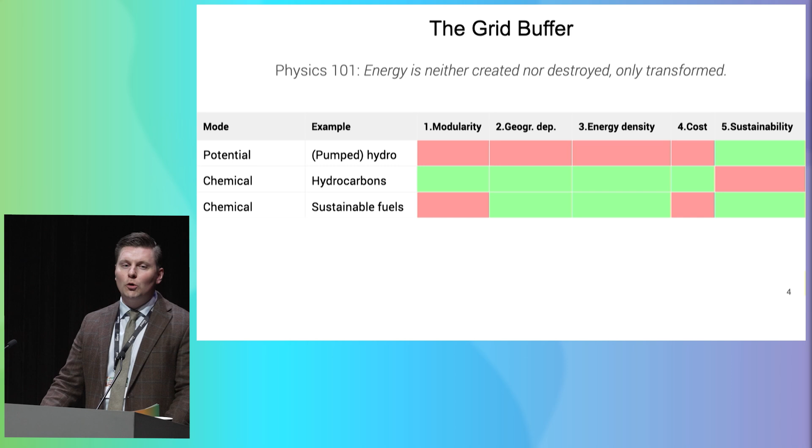We need to replace it with something. And I'm going to quote Brad Pitt from Moneyball: I don't think we can recreate fossil fuels, but we can recreate it in the aggregate. So sustainable fuels—ammonia, hydrogen—will definitely play a role there for high energy density applications.

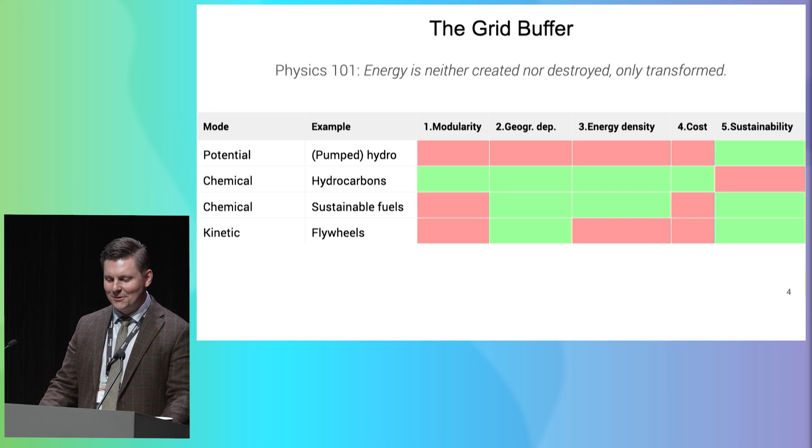There are a bunch of others, and I'm taking the liberty here to talk about some other non-applicable options. I mean, we can use kinetic energy, we can use thermal energy, but these—I hope nobody here is working on them—kind of suck.

Well, now you really see my bias, because I posit that electrochemical energy, or batteries, is the way to move forward with energy storage for medium and low energy density applications. They're modular—you have them on your phones, your laptops, your cars. They're geographically independent. Energy dense—well, sure, for cars, but currently not for aviation or maritime. Cheap—well, we're getting there. And sustainable—well, depends on how we use them.

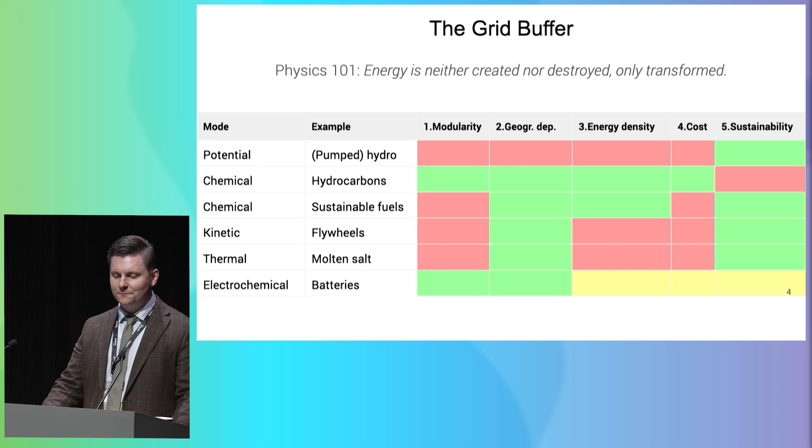Now let me give two quick case studies. I spoke of inconsistent federal regulation in the US, but California has been very consistent for the past 50 years—for example, their fuel standards have been adopted by other states and ultimately at the federal level. California has increased its proportion of solar on the grid dramatically, only in the past 15 years, so it now composes a third of electricity on the grid.

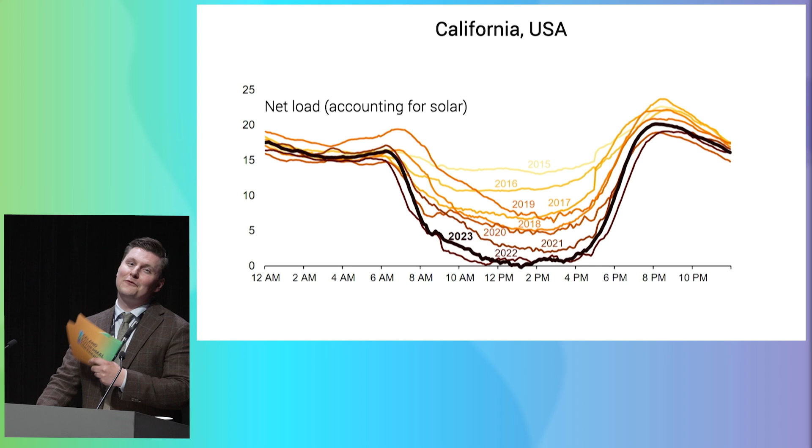What you see here is the famous duck curve, where you take the gross load and subtract what you get from solar. This is a year old, but what you'll see a lot these days is that on a sunny day, the net load on the grid will actually be negative. So if you're using batteries, you get paid for charging them. I think this has been the case in some parts of Germany as well.

The second case is the Westfjords in northwest Iceland. They are a remote area with a single transmission line that traverses a mountain. Murphy's Law is a thing, so invariably at some point during the winter it will trip, meaning the region becomes dependent on costly and unsustainable gasoline generators. So my proposed solution, instead of building a new buried transmission line that would be ten times more expensive and take a long time, is to use modular grid storage to actually resolve this problem.

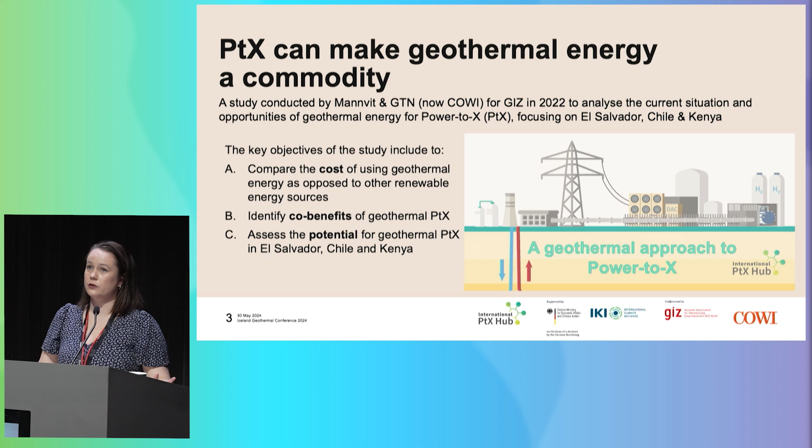This was mainly done through desktop research and interviews with experts in the field of geothermal power to X and regulators. Power to X can make geothermal a commodity that can be transported quite easily, and perhaps open up locations previously not considered desirable for power generation.

There are at least two small-scale geothermal hydrogen projects operational, one in Hellisheiði and one in New Zealand, producing 750 kilowatts and 1.25 megawatts respectively.

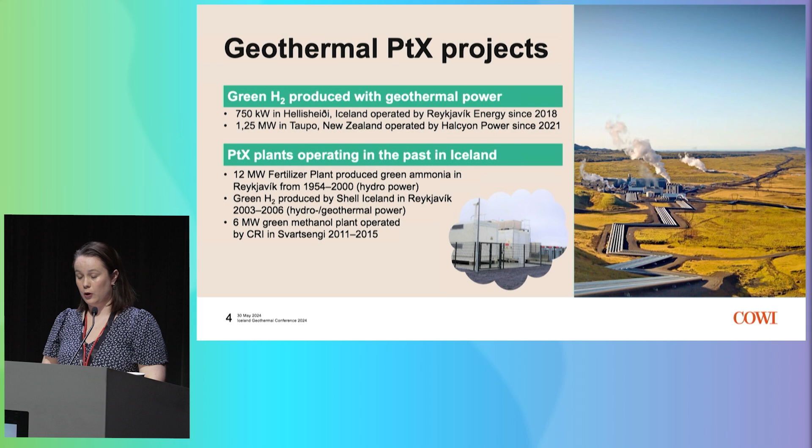In Iceland, some power to X plants have operated in the past. Just to name the obvious example, Carbon Recycling International operated a plant next to the geothermal power plant in Svartsengi, using 6 megawatts of geothermal power.

Hundreds of projects using other renewables, such as solar, wind, and hydropower, are currently being planned. But based on the findings, there has been significantly less focus on using geothermal.

The main derivatives are hydrogen, methane, e-crude, methanol, and ammonia, and most or even all power to X processes begin with the electrolysis of water to make hydrogen. Therefore, for any power to X project to become economical, the cost of hydrogen is crucial.

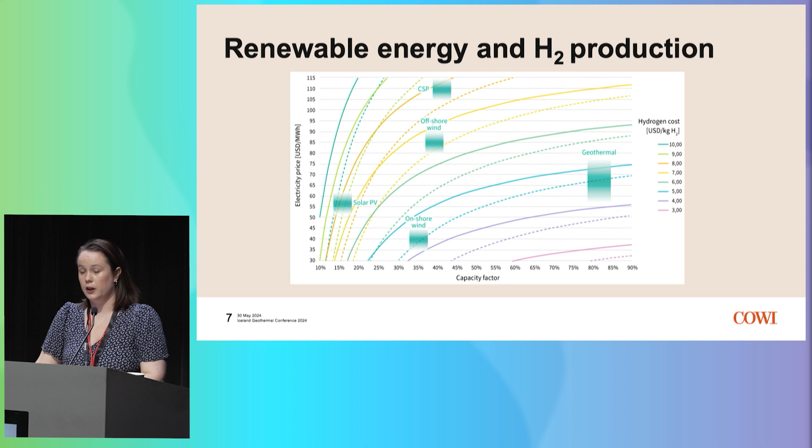The broken and unbroken lines represent different types of electrolyzers, and the cost of hydrogen was based on average electricity generation cost for each renewable energy, given in an IRENA report published in 2020.

I'll go into this a bit later, but a combination of renewable energy sources is something that should be considered. The main advantage identified in the study, as we've talked about before, is the stable power supply, grid stability, and high capacity factor.

Some other potential co-benefits of using geothermal sources for Power-to-X: the obvious one is direct use, which can provide heat supply for either the Power-to-X technology itself or the electrolyzers in the future, potentially. Then there are less obvious ones, looking into direct uses or cascade uses.

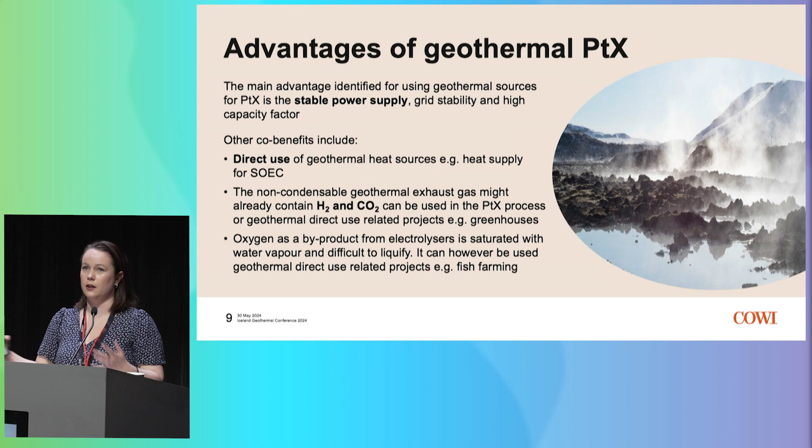The least obvious one is the oxygen from the electrolyzers, which is difficult to use in other applications, but could be used in a cascade system, for example, for fish farming.

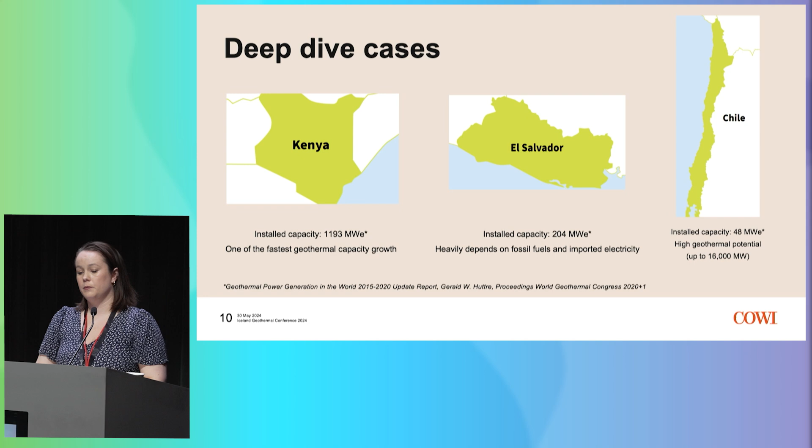These are the deep dive cases, selected by GIZ: Kenya, El Salvador, and Chile. Kenya has geothermal capacity growth which has been one of the fastest in the world. Chile and El Salvador have favorable conditions but currently not much electricity produced with geothermal. There is extremely high potential for Chile, and El Salvador heavily depends on fossil fuels and imported electricity, which makes it interesting.

Going a bit into the deep dives: Kenya has expansion estimates for renewables, both geothermal and wind and solar. Currently, Kenya has a renewable energy surplus during the night and even sometimes during the day.

So opportunities for Power-to-X have been explored and are currently being explored, with three areas identified for high potential: at the coast, near the geothermal areas, and in industrial areas.

One of the greatest opportunities for Power-to-X in Kenya is the production of ammonia for fertilizer production. Most of the currently used fertilizer is imported, so this would be a great thing to have produced locally.

It also came up during the study that Kenya could become a refilling point for ships in the Indian Ocean using the ammonia.

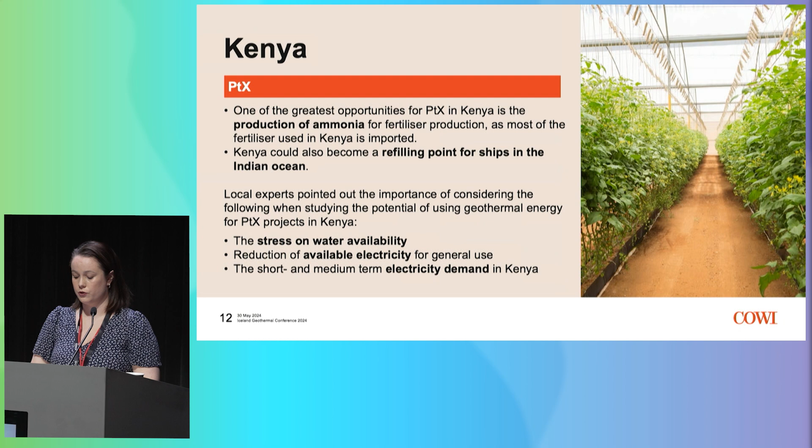But what was really stressed during these interviews is that local experts pointed out it's very important to consider that Power-to-X would increase stress on water availability and reduce available electricity for general use. Also of importance was giving back to the local community, which is why the main focus is on fertilizer production to increase accessibility and affordability.

For El Salvador, there are plans to increase the current geothermal capacity. An energy plan is in the works and might have been published by now—this is a 2-year-old study.

But there are still no concrete strategies for geothermal use for production of green hydrogen. There is no industrial production of Power-to-X, and the local market is very small, so export would be of most interest in El Salvador.

For Chile, in terms of geothermal energy, there is one power plant which is to be expanded. There are many geothermal areas that are very remote and hard to access, even though there is this massive potential.

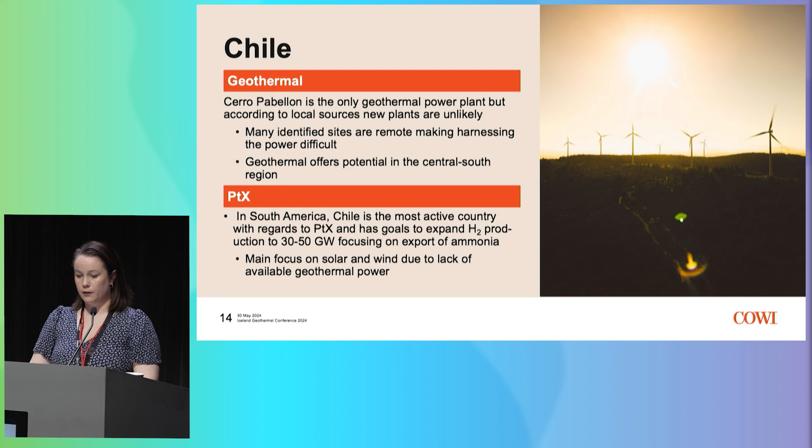In South America, Chile is among the most active countries in terms of Power-to-X, with the goal of expanding its hydrogen production up to 30 to 50 gigawatts, mostly using wind and solar. The focus of these projects is mainly export of ammonia or methanol.

To finish, the main recommendations: combining different renewable energy sources for Power-to-X projects should be considered, because a complementary setup can achieve high capacity factors and a reduction in total cost.

The construction of new geothermal power plants is usually stepwise and, as we know, takes 10 to 15 years, and it also involves high upfront payments. So having this mix of renewable energy sources can help the Power-to-X project start.

Also, as always, studying the location of the proposed project should be done—there are many additional factors that contribute to this beyond just geothermal energy. And then finally, to investigate the project cost and related options based on the actual energy cost structure.

The calculations in the study can assist to define the possible cost for hydrogen production. Yeah, that's all I have. Thank you.

Thank you very much, it's an honor to be here, and thank you for the opportunity. As described, I'm from Arctic Green Engineering. Yes, Mannvit joined COWI, except the Hungarian subsidiary, which joined Arctic Green, and we now provide engineering services as an Arctic Green company for geothermal projects, now and in the past. I will talk about geothermal energy and balancing by geothermal energy.

I don't know if you have ever thought about this, but geothermal energy is maybe the only renewable energy that can provide everything: electricity, heating, cooling by the heat, and also life quality and well-being through bathing and all kinds of installations like we can see here all around.

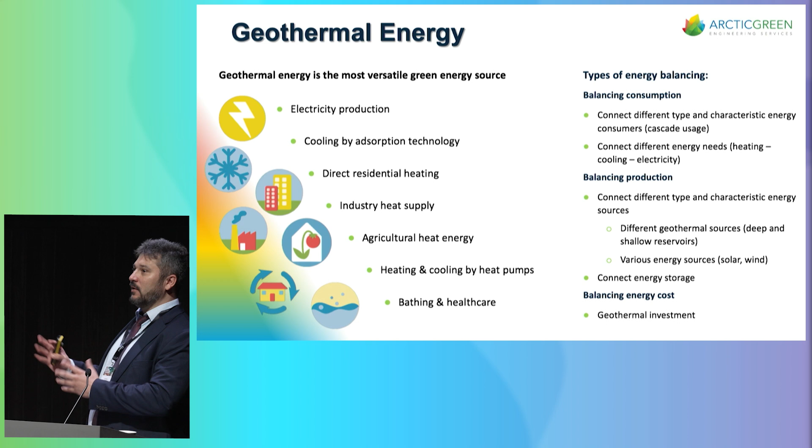But how can we balance it? Geothermal is for base load, everybody knows and talks about that. But what if the demand is not continuous? Then we have to take measures or combine different consumptions to balance production and utilize its baseload capacity. But what if there are other energy sources, like solar or wind, which are not stable? Can we use geothermal to adapt to those fluctuations and balance them? I will show that. Of course, geothermal by its nature is also very appropriate to balance the long-term cost of energy. Those are the three topics I will talk about now.

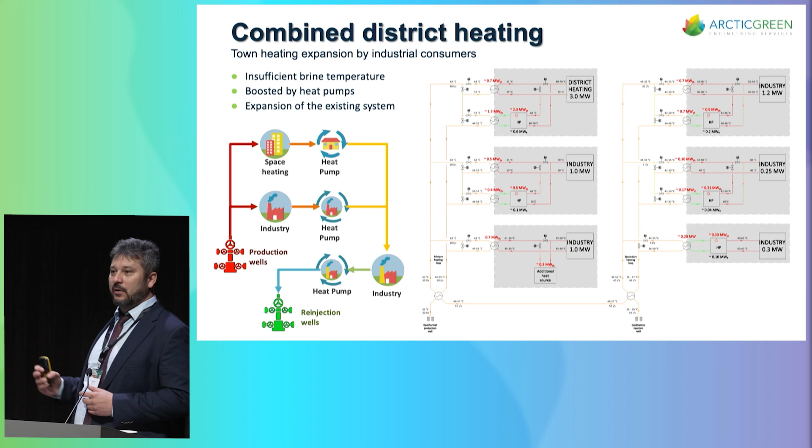First, about heating. There is a small system we are developing: a small district heating system where the heating temperature is not so high, but the resource temperature is somewhat lower. That's why we implement heat pumps to boost the temperature a little during peak seasons. There are other consumers, industries willing to join, some with high temperature heating needs, some with low temperature needs. We connect them into a cascade system, where the wastewater from high temperature utilization can still heat the low temperature consumers, boosted by heat pumps as needed.

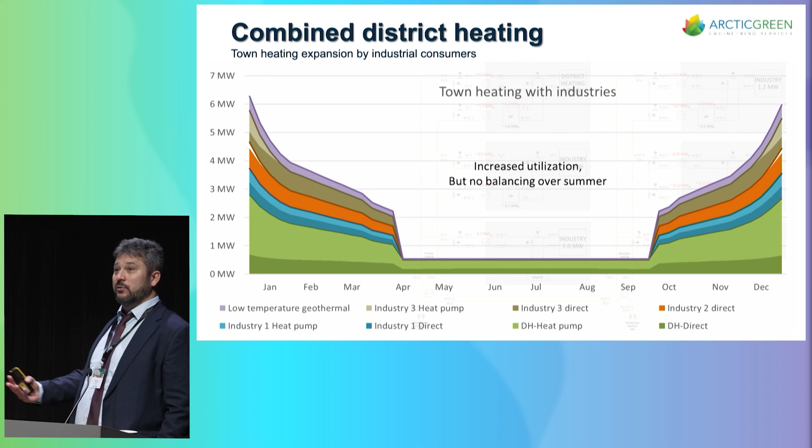But still, over summer there is almost no heat demand, so it's not really using the base load capacity of geothermal energy. How could we utilize it? We could utilize it by connecting other energy types.

Another example: an industrial user who has both cooling and heating demand, for technology and for comfort, with different temperatures and needs. If we connect them into one system, then over summer cooling could be provided by absorption chillers. Of course, the technological heat demand is continuous. Both heating and cooling demand are continuous over the year, but comfort heating peaks over winter, and cooling peaks over summer. By connecting them into one system, the energy demand becomes quite balanced.

Almost 100%. The cooling demand cannot be fully provided by the same system because of the efficiency of absorption chillers, so some conventional cooling solution is still necessary to cover the peak. But you can see in this curve, it's totally different from the previous one — the cooling can utilize the base load capacity of geothermal.

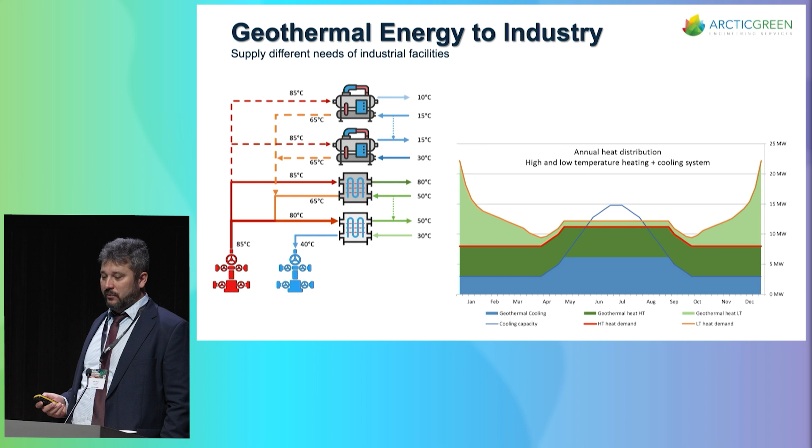What could be even better: if you build a geothermal power plant, use the waste heat for heating, greenhouse heating, or a district heating system, secondarily with heat pumps, using more of the heat. But in most cases, the waste heat of the power plant is limited by temperature and by its amount. So what could we do if the geothermal power plant is controllable? We can reduce somewhat the capacity of the geothermal power plant over the coldest days of winter, and then supply a much higher energy amount for the heating systems temporarily when it's needed.

You can see the dark blue line is the capacity of electricity production—it's a 4 or 5 megawatt power plant. Normally, without this controlling, the waste heat capacity could be 10 or 15 megawatts thermal, which could be supplied for any kind of heating system. But with this controlling, if we reduce the electricity capacity over winter, we can supply more than 40 megawatts to the heating system. Obviously, the produced electricity amount is a little lower, but the additional benefit is that we can supply a very high amount of heat, both for greenhouses and for space heating systems.

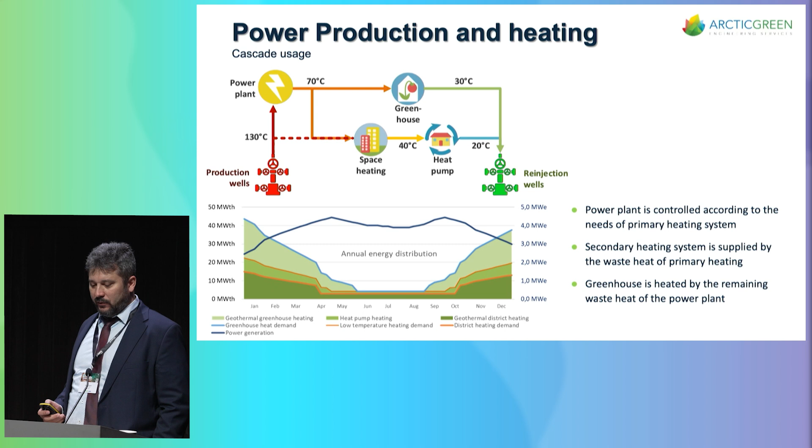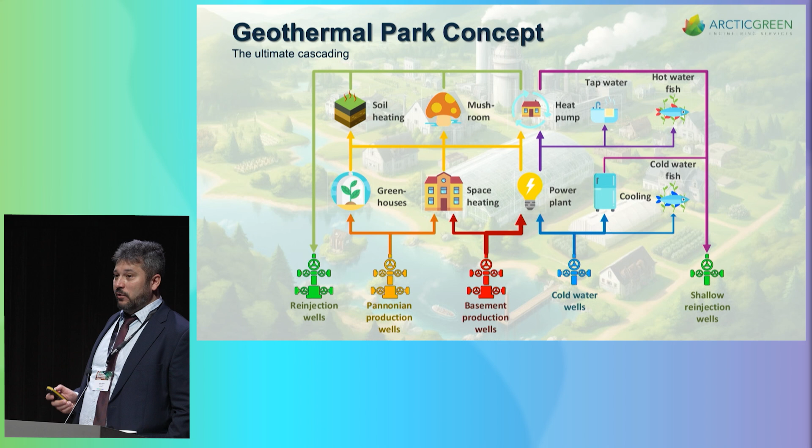I will maybe skip that to save time. There was a project we designed where almost all of the Lindal diagram was planned to be built. Unfortunately, that was never executed due to financial issues. But the project included hotels, spa, agriculture, and fish farms—all planned. The plan was to drill different wells for different reservoirs, including shallow wells for cooling, along with a geothermal power plant. That could have been a really good efficiency utilization of the geothermal resource. We will not go into those details.

Let's talk about electricity production. I will talk about binary production, focusing mainly on European, Central European conditions, where steam turbines or flash systems are rarely applicable. Conventional binary cycles, ORC plants, tailor-made design—that's shown in the lower right corner—are very, very commonly used.

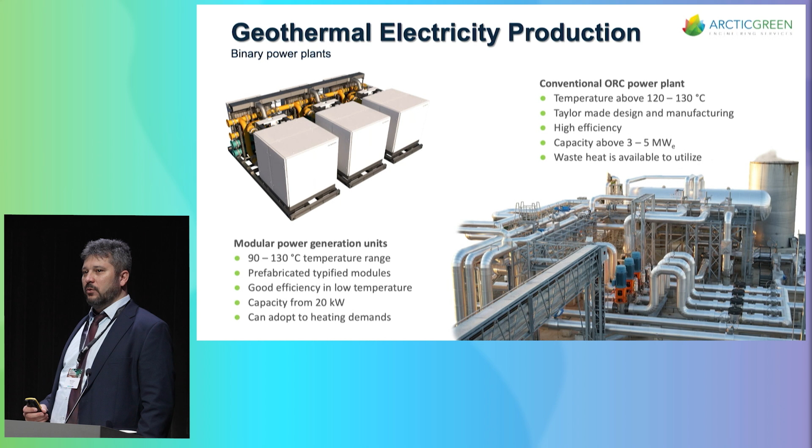Other option is the small modular system. Marta probably knows it better, which can adapt very well to the needs of the heating system for small installations, but they are very well controllable. I will get back to it later. They can be very well installed in addition to any geothermal heating system, or designed together with one.

How about geothermal electricity production? It's a baseload power—yeah, that's true. It has continuous operation 24/7 all around the year. It's not dependent on weather changes. It requires some minor maintenance, everybody knows, so it's a very, very stable and reliable electricity source.

But if we go into the details, are these really true? Yeah, it can operate continuously except for maintenance, but is it really weather-independent? More or less, yes, but if the cooling is not provided directly by cold water and there is instead air cooling, then the ambient temperature has some effect on the efficiency of the power plant. When the weather is warm, as shown on the next slide, there is a decrease in the efficiency of the power plant, and the cooling system also requires higher energy amounts to operate.

So there is some small weather dependency in geothermal electricity production as well. If we see a daily distribution, the picture is a little more equal—there are minor differences overnight versus over the day when the sun is shining and the weather is warm. There is some small decrease, but it's quite constant. Of course, there is a difference between a winter day and a summer day.

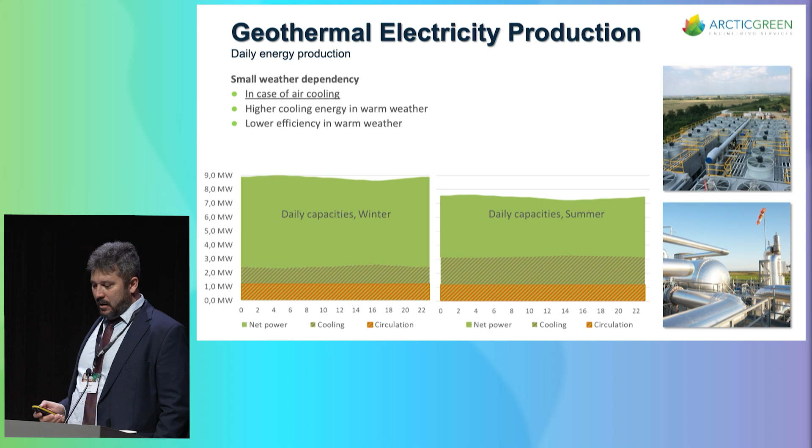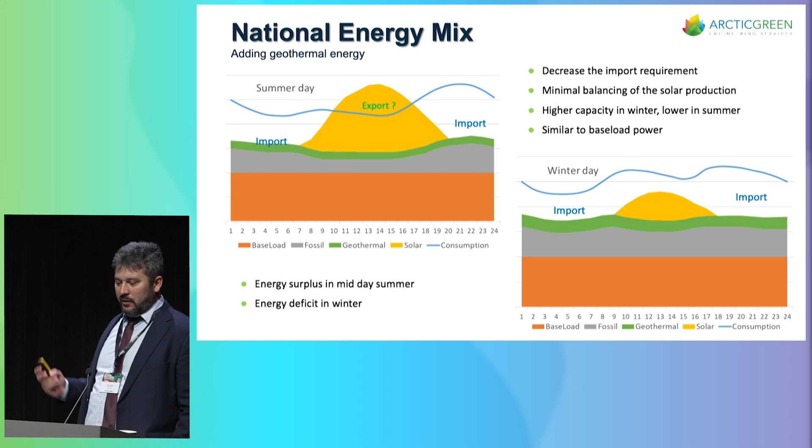How does this curve look if we add geothermal capacity? A few hundred megawatts, not a huge addition. If you have good eyes, maybe you can see the green line is somewhat thinner at midday, but that's minor—so really it works like a baseload, adding capacity to the orange. So by its nature, it's not really balancing the energy.

But there is an idea, and there are more and more talks about it: that the geothermal power plant system consists of two parts—there is the brine system, harvesting and circulating the brine, and there is the power plant.

What if we turn off the power plant at midday and keep the brine circulation, using the energy for cooling, for example with absorption, or just have it as a consumer? Then we can consume the electricity produced by solar, for example. We can use it for cooling and not producing, of course. That's a balancing act. If it's a good, environmentally friendly solution, well, I'm not sure. That's kind of firefighting, but it could still be a solution.

And if the energy price is negative, it can even generate some profit. The power plant can adapt, so it can be designed to be controllable. That increases the capex somewhat, but still, it's a solution.

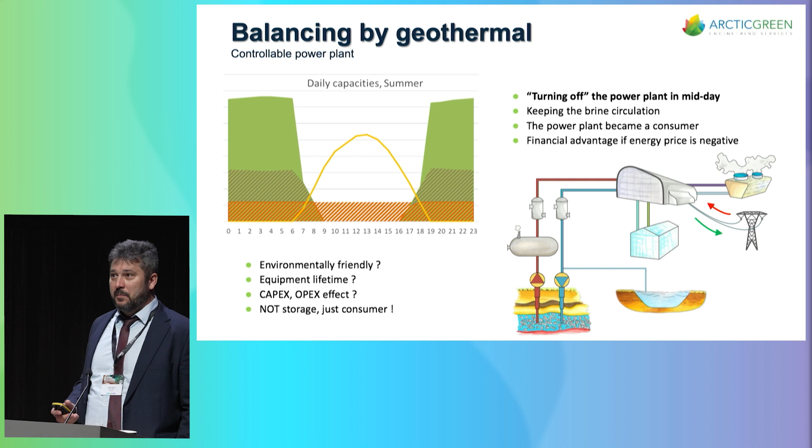I have two very interesting curves about the costs, but my time is over, so I'll just tell those who are interested about them. Okay, thank you for your attention. Thank you.

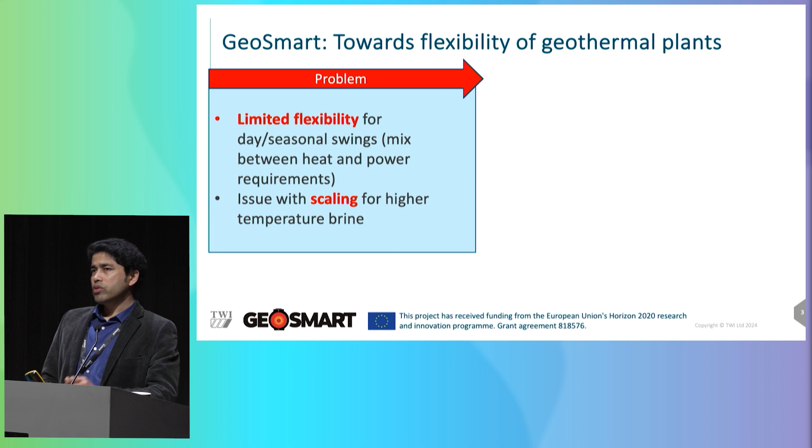In the project, when we started a few years back, over 4 years ago now, we started to look at the limited flexibility of geothermal, and there were some scaling issues in the geothermal plants. We have three partners, but two actively involved in the power plant industry: one from Kızıldere, Zorlu Energy in Turkey, and the other part of Vulcan Group in Germany, not too far from Karlsruhe, in a place called Insheim. They've got a plant there. So we thought maybe we could look at the energy storage part of it to increase the flexibility of geothermal plants, and then also look at the ORC system with adiabatic cooling, and maybe look at scaling reduction systems.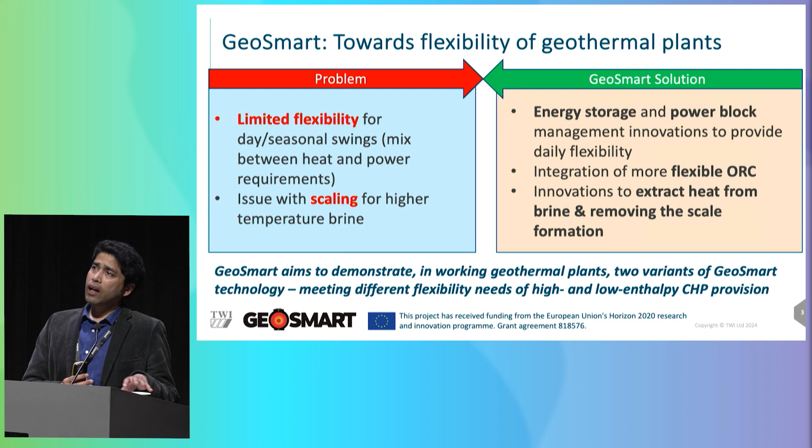So what am I going to talk about? I'm going to talk about phase change materials, which are used for thermal energy storage. One of the simplest known phase change materials is water, and it has been used for a long time in terms of using the latent heat for energy storage, or rather energy conversion.

Typically in these phase change modules, what happens is when you have the hot fluid, in this case could be geothermal fluid, you use the heat to then convert a phase change material or material - it could be salt, it could be some other fluid, which can undergo phase change within the temperature range you're working on. It uses the energy and stores it as latent heat, maybe converting from solid to liquid and staying liquid for a bit. When you need it, you can then pass a cooling fluid, could be water, could be something else, to extract the heat, taking the latent heat out of that phase change material and using it elsewhere. The problem with this is the selection of phase change material - you need to know exactly the temperature range and a few other things to find the right one.

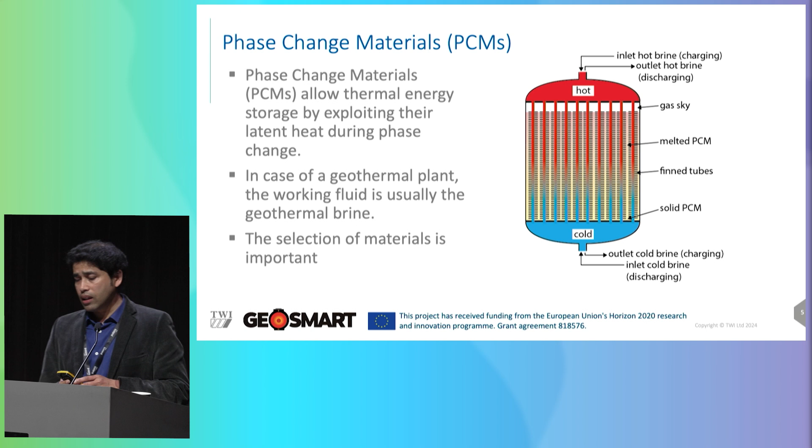When we started this project, we looked at literature and at what partners within the consortium had done in this area. We decided to start with one of the most commonly used materials, one that we thought would be really good because of its very high melting enthalpy. The temperature range we were looking at for these systems was typically between 120 to 130, 140, so that meant this could be something we could use.

So I've listed some of the things one needs to look at: operating temperature, melt enthalpy, diffusivity, and cycling stability, which is quite important because if you're cycling through several hundreds or thousands of cycles, that becomes a significant factor. Also vapor pressure, health and safety related toxicity, and cost is always important.

And a few other things which I haven't quite noted, because we realized in some cases, when we actually started with the adipic acid, we found some challenges which we didn't consider at the start.

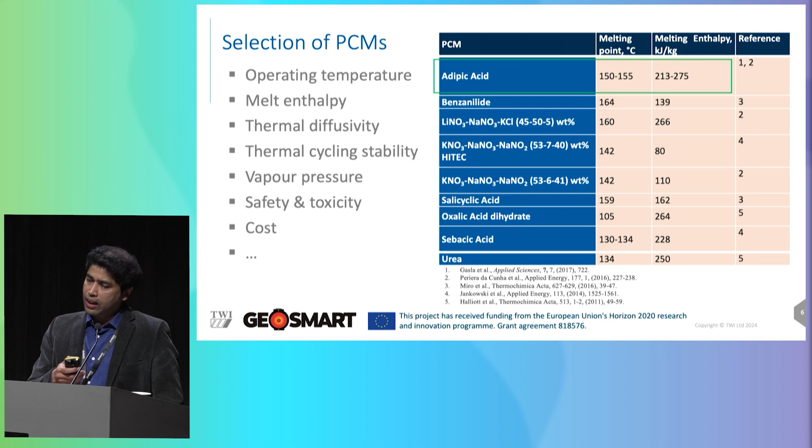This work was done by my colleague Sebastian from Fraunhofer in Germany, and they started to look at the aging issues with the adipic acid. The team carried out 1,000 hours of testing in air and argon, and found that there is quite a bit of degradation happening due to these cycling processes.

After 1,000 hours of cycling, be it in air or argon, we thought there would be a significant difference between the two. But what we found is you're typically seeing maybe a 10% reduction in terms of enthalpy. So over the years, the system would slowly degrade, and the thermal energy storage capacity would also decrease by about 10% or so within the 1,000 hours that we did.

The other thing we wanted to understand is whether commonly used materials of construction could work with this kind of phase change material. So we took three of the most commonly used construction materials: aluminium, carbon steel SA179, a specific grade of carbon steel, and we also wanted to check one of the commonly used stainless steels, 316L, to see if that would work too. We know it's a lot more expensive than some of the others.

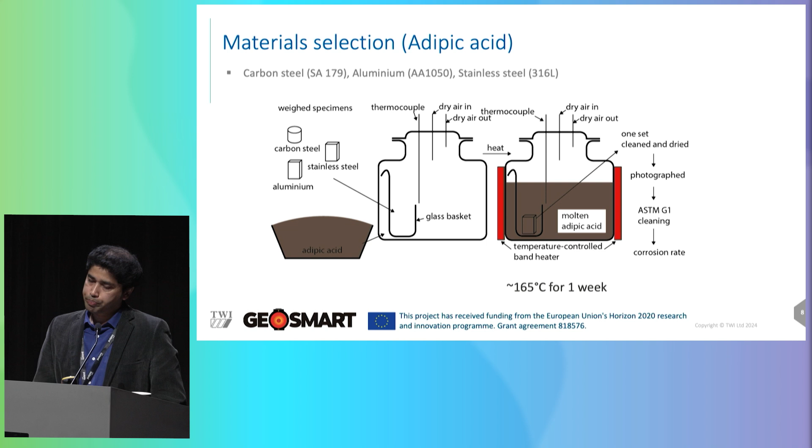What we found is that in carbon steel, we could very easily determine there was some tarnishing or corrosion process happening which changed the color or appearance of the surface. In case of aluminium, there was some difference. In stainless steel 316L, we couldn't really find much, and there was no localized corrosion either.

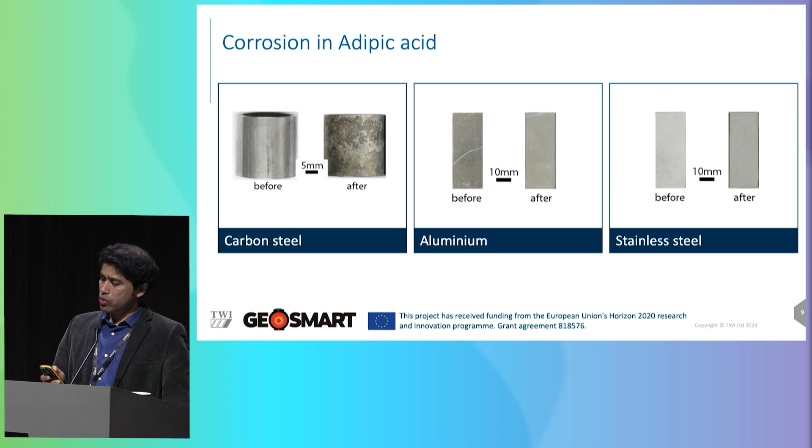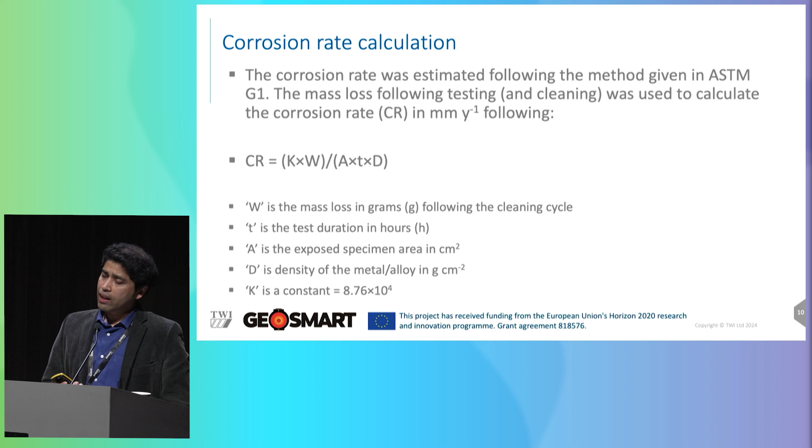As I said, we used the ASTM G1 cycle, so you weigh your sample before and after, go through cleaning cycles, and use the equation there. It's basically a first principle determination based on surface area and mass, and we calculated the corrosion rate. What we found is that in case of carbon steel, the corrosion rate was quite high.

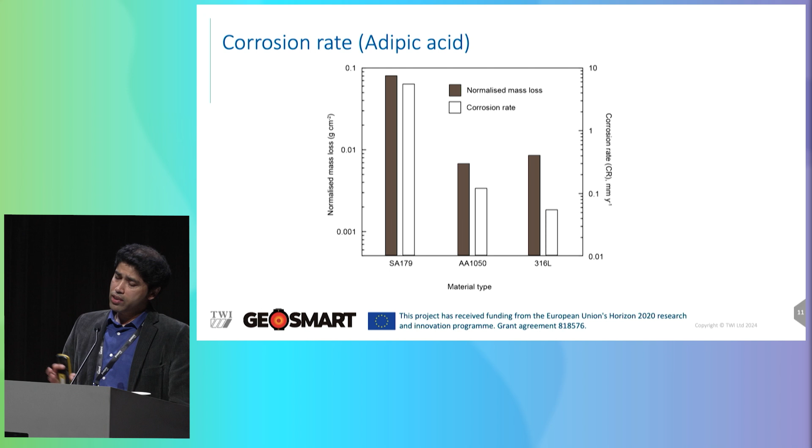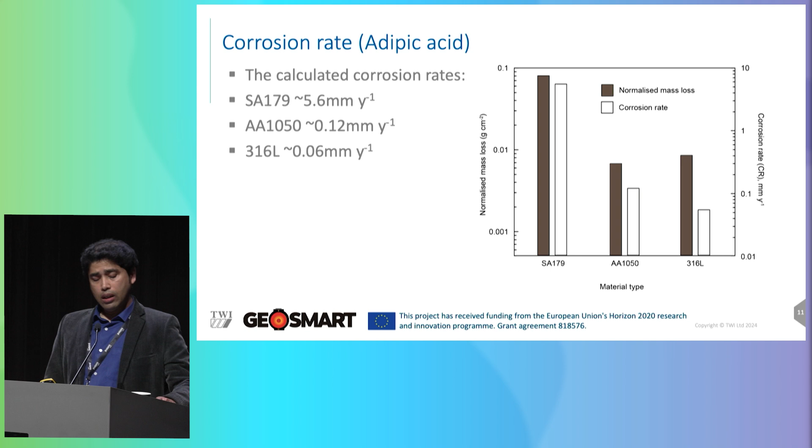You can see the numbers are quite high there, about 5.6 or 6 millimeters per year or so, and in case of 316L and aluminum, they were more manageable. When we looked at the numbers in more detail, it came out to over 5.5 millimeters per year, which is unrealistic — a plant cannot operate with corrosion rates that high. Aluminum was pretty good, and 316L we knew would most likely be quite good too, but due to cost-related issues we couldn't possibly use that kind of material for this plant. So we had to go back to the drawing board and start again.

We found another supplier, Dufrit in Germany, who said, okay, do you want to try this particular system? They have used it before and think that might be the solution we are looking for.

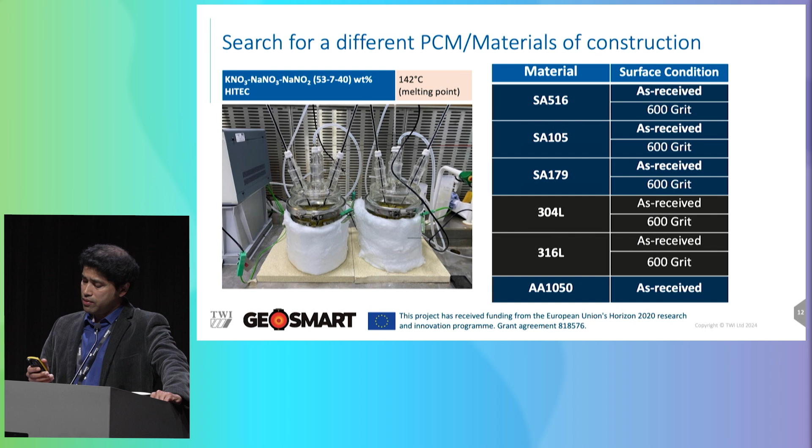Although the melt enthalpy is a bit lower than adipic acid, we thought, okay, we don't have any other options, so let's go for that one. And this time we started to look at other materials as well, not just 179 SA, SA516, 105.

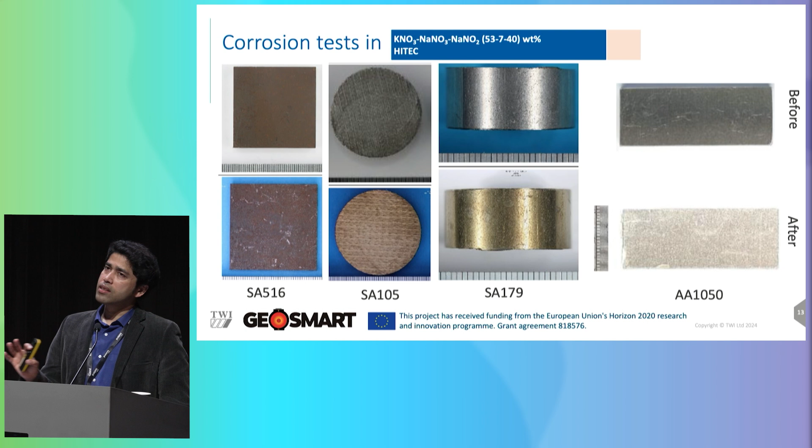We can see that in some cases there's a clear difference in the coloration, which indicates some changes, possibly corrosion. We calculated the corrosion rate, and in the case of carbon steel 179, we found that this is maybe acceptable - still manageable in terms of the corrosion rate for the plant itself.

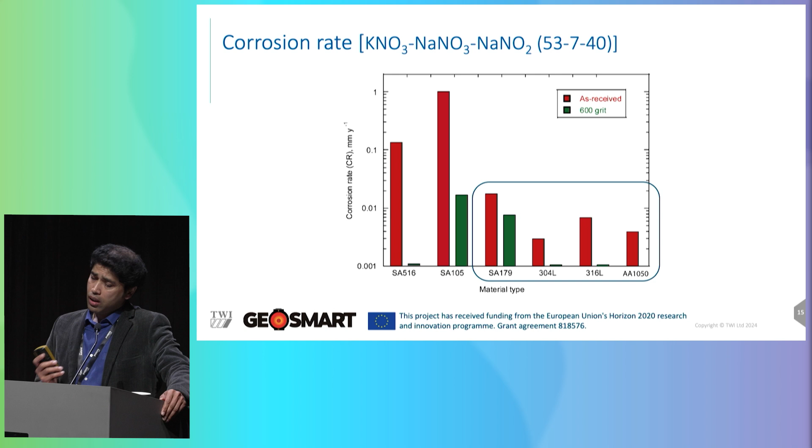In the real plant, what we are using is the SA179 tube with aluminum 1050 fins. That system seems to work in the pilot plant. The bigger plant will be installed in Kızıldere, Turkey, around the end of August, early September.

So to conclude, we started with a bit of an unknown in terms of which type of PCM to use in this particular application. Then we figured out through trial and error - there was a lot of learning to be done. We started with one system, realized that doesn't quite work, went back to the drawing board, found another system, and that seemed to work.

So we are going to use the SA179 with a nitrite mixture, HITEC salt, and 1050 aluminium fins for the PCM storage. These are the tubes with the aluminium fins in them. For people thinking of other systems where they want even lower corrosion rate and have deep pockets, 316L might be an option.

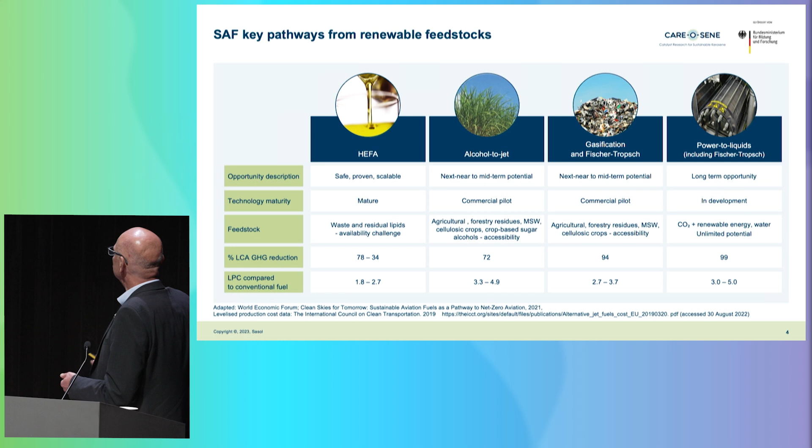For the far right, the Power to X area, some literature talks about figures of 3 to 5, others even talk about 6, 7, 8. So it's an area where you have very high cost to produce that kind of fuels. I will focus now within my presentation on the last two columns here. But as said, my focus is on how can we bring down that cost - what can we do to do that, and then bridge this to the geothermal area.

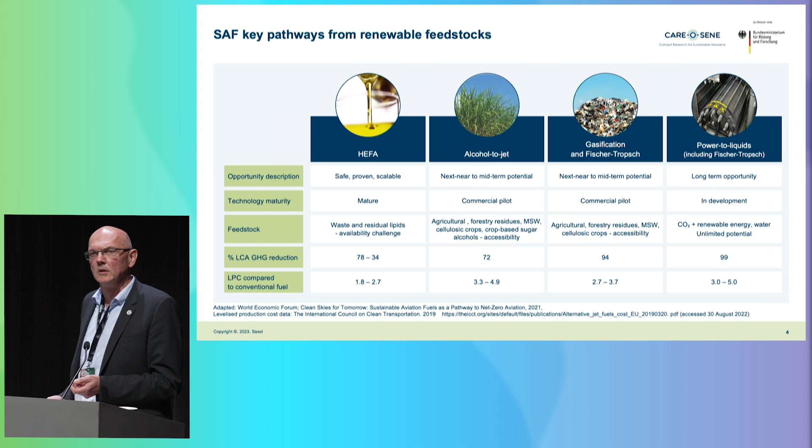Just a little bit about Sasol and why Fischer-Tropsch is so of interest. The Fischer-Tropsch technology can be made on different feedstocks. You only need the so-called syngas, which is a combination of carbon monoxide and hydrogen. As long as you have the syngas, you can do Fischer-Tropsch.

So the feedstock for the Fischer-Tropsch is absolutely feedstock agnostic. We can start from coal or gas, which is the traditional way, or you can also start now with carbon captured CO2, or with bio feedstocks or whatever. Sasol has a long experience in that area, knows everything about Fischer-Tropsch. We are active for more than 70 years in that area, and for this reason we think we are well positioned to bring this technology into the future.

Karen already talked about the electrolyzer route, where you start with green energy. You need an electrolyzer to convert this into hydrogen, and then further process this. What we also need is the carbon source, which could come from a direct air capture source, like many of us saw yesterday in practice at Climeworks. Then you need a reverse water gas shift, and then you have your first step for syngas.

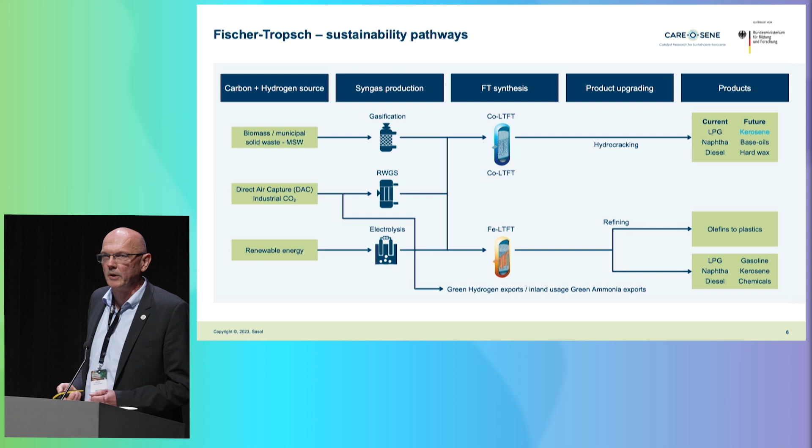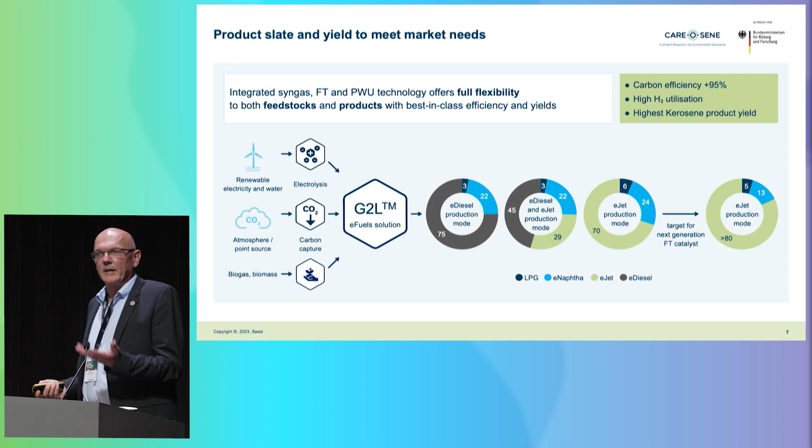Do you want to get a kerosene product? Then your best way is to choose a Fischer-Tropsch low temperature process and a cobalt catalyst. Where we are at the moment is that there are catalysts out there, also from Sasol, that can produce at the moment Fischer-Tropsch crude, or E-crude, like Kathleen also mentioned earlier. That can be converted up to 70% into your target molecule, kerosene.

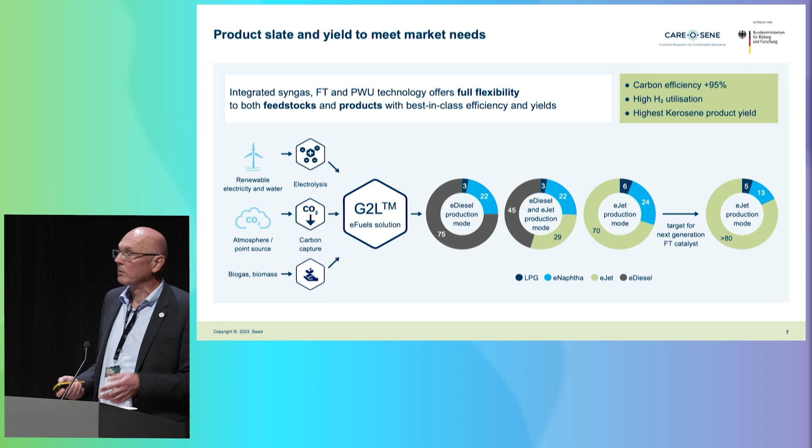What we have done now within the kerosene project is set ourselves a new target. We want to get more efficient to produce more kerosene and get above 80%. This has, and I will come back to that, a lot of advantages to your whole process. We are doing this within a big consortium together with universities, because it sounds like a small step from 70 to 80, but in chemistry it's still a big change.

In the consortium, we're working in different work packages - I will not go into too much detail with that. What we have achieved up to now is the combination of the know-how and technologies of the universities. They have fancy equipment that we as an industry would never have the money to invest in, but that helps us get a better view on what the catalyst is really doing in action.

So with them, their know-how, and their input into our development program, we managed to develop a catalyst already on ton scale that gives us an e-crude that looks like we can achieve these 80%. So that's the step we are now busy with, to really prove this theory in a practical way, and we hope we can get to this 80% also in practice soon.

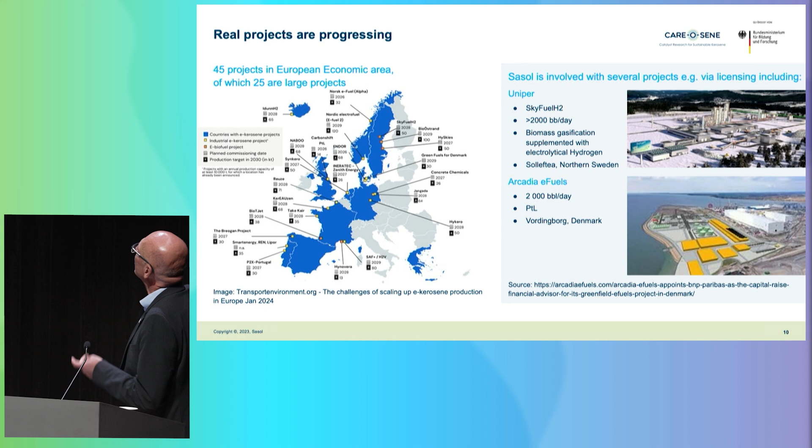Arcadia wants to build a power-to-liquid plant of 2,000 barrels per day, roughly 90,000 tons of product. It's really a power-to-liquid process, and the CO2 source is, as far as I know, a biogenic one. Another one is the Uniper project, SkyFuelH2 in Sweden, which is a combination of biomass and electrolyzer.

So let's combine that with geothermal. Why does geothermal come into play here? As we've heard several times, geothermal energy is rather stable, and the problem for us on the chemical side is that our processes are very sensitive to fluctuation. The Fischer-Tropsch process itself can run efficiently between 50 and 100%. Below that, you can't really run the plant, so you have to store your energy somehow.

That's the challenge: you lose energy, you need expensive batteries or hydrogen storage, which is a big challenge and cost factor. For this reason, and as a catalyst guy, it also means a lot of stress on your catalyst when operation goes up and down, impacting the catalyst itself. Combining geothermal energy with the Fischer-Tropsch or power-to-X process enables stable operation, with less stress on the whole catalyst and process.

And you lower significantly your investment costs - that's what I wanted to bring back. You don't have to build all the storage facilities for these interim products, you can scale down, and your efficiency gets higher. For this reason, it's a perfect combination, and even for direct air capture, combining with geothermal is also ideal.

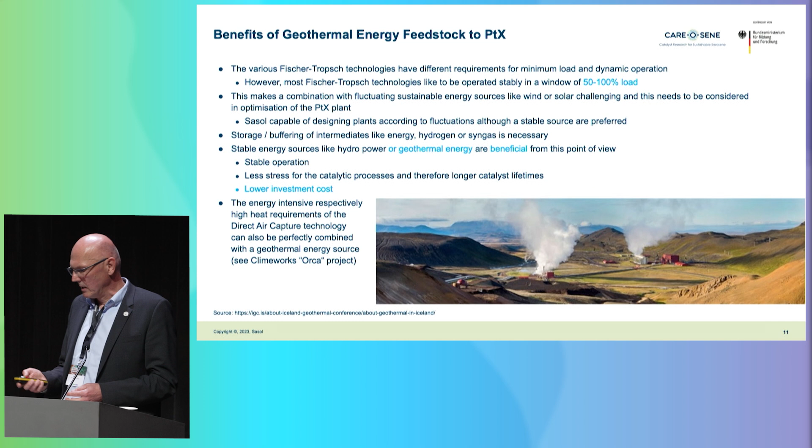To conclude, we at Sasol are one of the experts in Fischer-Tropsch with 70 years of experience. We're active not only in catalysts but also in licensing our technology, so we're looking for projects. On the catalyst side, we serve not only our own technology but also offer it to other technology providers. We have a very huge pilot facility, much bigger than some commercial plants currently out there - we can produce 300 barrels per day in that facility.

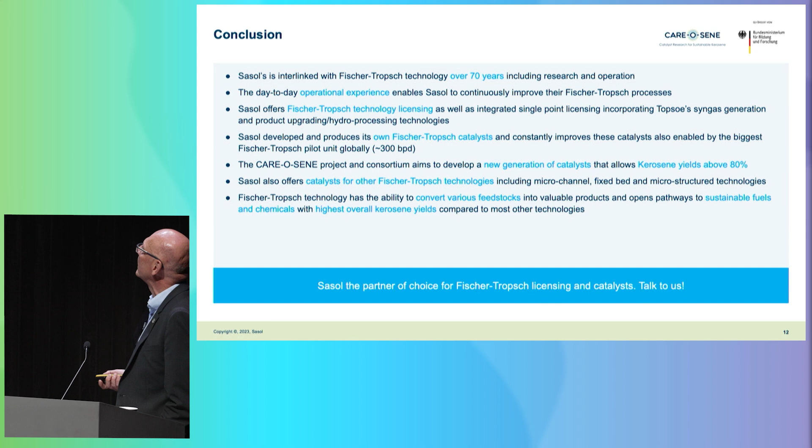And together, we hope we can lay the ground to make sustainable aviation fuels on a sustainable but also economically feasible basis in the future. With this, I'm thanking you for your time.

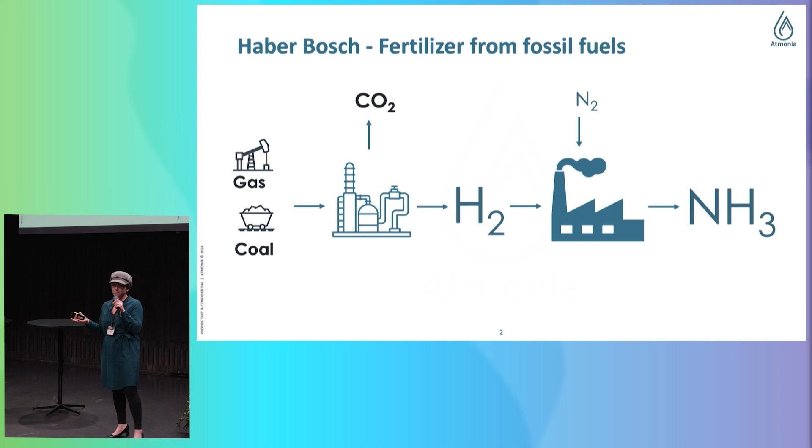Great, wonderful. So at Atmonia, our goal is to reinvent the nitrogen economy with versatile and distributed ammonia production, applicable with sustainable and intermittent energy sources. Just to recap how ammonia is produced today - this is the Haber-Bosch process. It takes in gas, performs steam reforming to produce hydrogen, and releases a lot of CO2. The hydrogen is then reacted with nitrogen at high temperature and high pressure to produce ammonia. This is done at significantly large industrial scale, and these operations have to be continuous 24 hours, 365 days a year. There are many ways this is being developed further to make ammonia production more sustainable, one of which is capturing the CO2, creating blue ammonia with CCU technology.

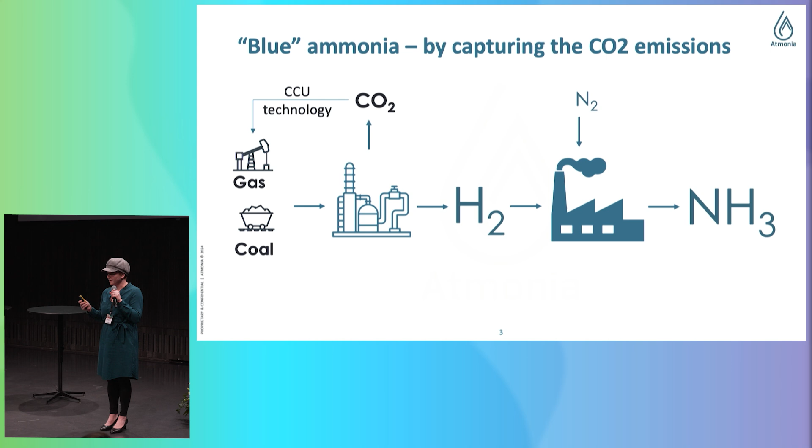But it doesn't really solve the intermittency. It's still operating 100% of the time.

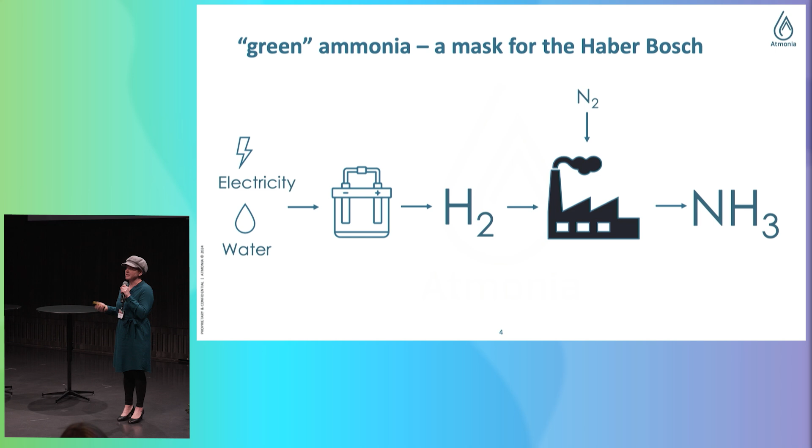Another way is just to produce green ammonia with an electrochemical process or with electrolyzers. The continuity of the Haber-Bosch process itself remains - it needs to operate continuously. It's really difficult to turn something off that's 350 degrees and 150 bar.

Our process simplifies it significantly. This is, of course, a highly simplified picture, but it's an electrolyzer in an aqueous solution that produces ammonia with potential, with a very specific and engineered catalyst on the cathode. This is operating at room temperature and pressure, and that means that we can operate when the electricity is available and then just turn it off.

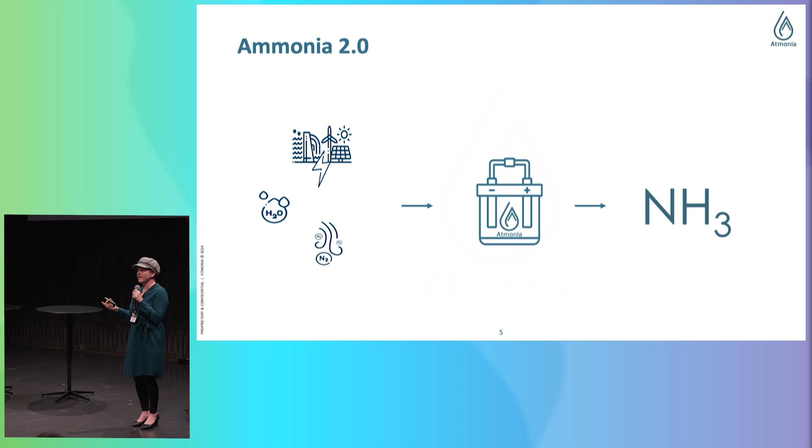If our process, our electrochemical electrolysis of nitrogen to produce ammonia, was operated on the European electricity grid, the emissions from the grid itself would cause the cradle-to-gate CO2 emissions from our process to be significantly larger than the Haber-Bosch world average. And this does apply to all electrolyzers, just to remind you of that. It's not just ours - whenever you're using electricity and claiming to be sustainable, that electricity needs to be sustainable in order for the process to be as well.

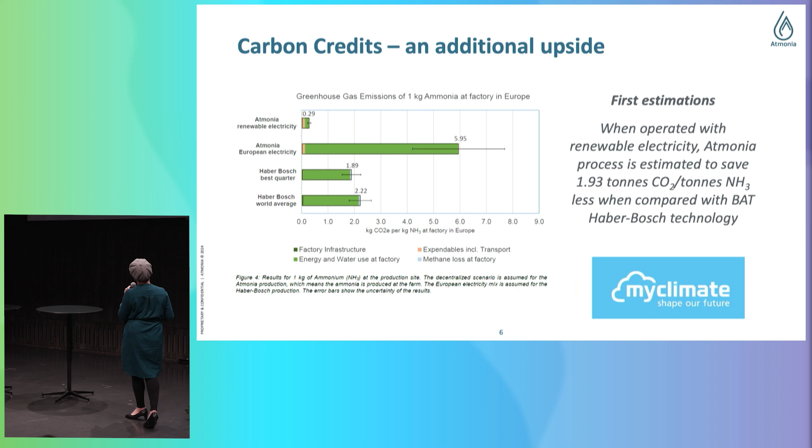And that's quite clear here, because if we were to use renewable electricity, we can save almost 2 tons of CO2 per ton of ammonia produced.

Part of that is the versatility and a completely different business model, and that's why we are entering a completely different market. Now, with room temperature and pressure, we can produce whenever the electricity is available.

As soon as we can take the ammonium that we produce and separate, compress, and turn it into liquid anhydrous ammonia, the demand will increase from the 200 million tons per year as it is today to about 600 million tons, as is anticipated, because of the fuel perspective of ammonia.

We have a significantly low capex. This way we can save 3% and even more of global CO2 production, provided that our process is taken up globally, of course. And the trick to this is using otherwise curtailed energy that's not being used today.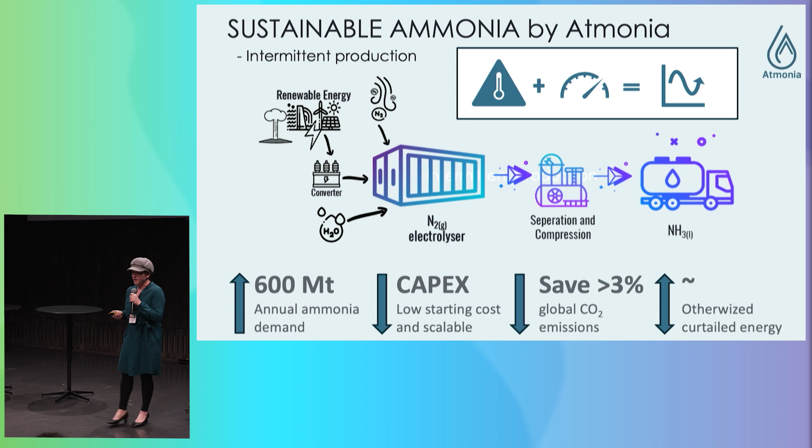And we are developing this process for liquid anhydrous ammonia production in collaboration with a company in Germany, and we're really, really excited about that.

Now, how does this relate to geothermal electricity? It's a fairly stable baseload production, and that was the question that I had before this conference. We've been thinking about this also because we are developing this process in Iceland, and Iceland just happens to have a significantly stable resource of electricity. And we're completely going for the fluctuations.

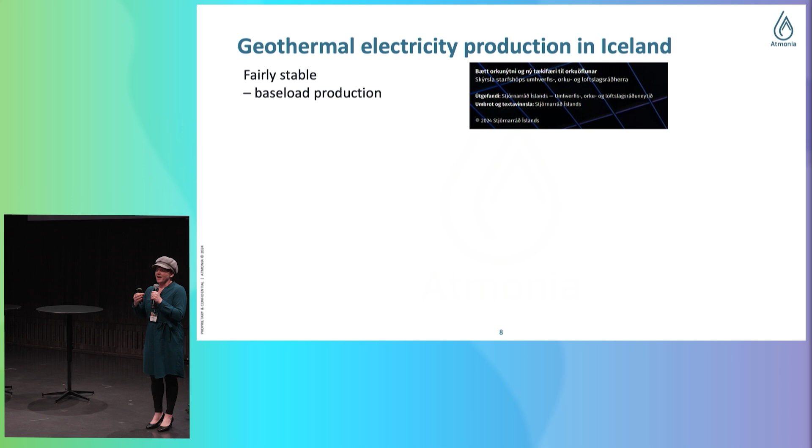Now, there was a report published in April this year about the future of electricity production in Iceland, and one of the chapters - I know this is in Icelandic - suggests studies towards making geothermal more flexible. While the world is fighting the problem of intermittent electricity production, in Iceland, we just happen to have the problem of too stable electricity production.

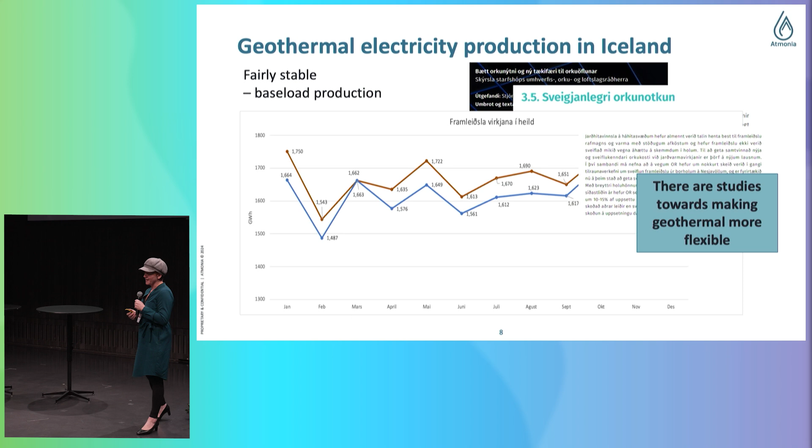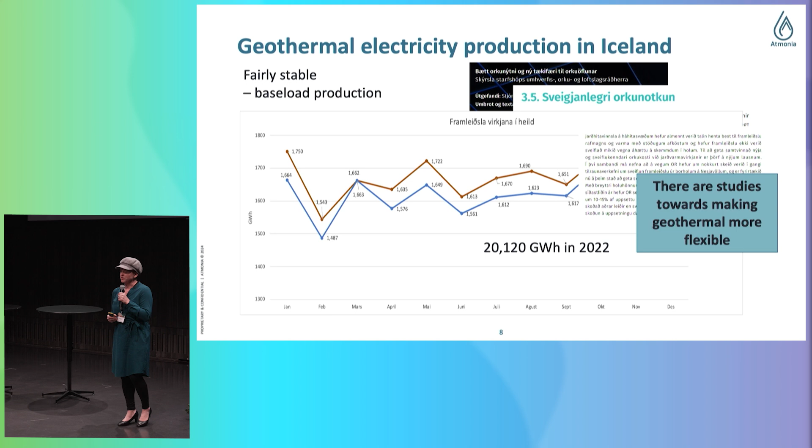I went to Orkustofnun online and collected a lot of data. That's all open source - I'm really lucky, I'm happy with that. I could see that in 2022, Iceland produced 20,000 gigawatt hours of electricity - this is the total electricity produced. Then in the same year, we consumed about 19,000 gigawatt hours. So there's a bit more than 1,000 gigawatt hours that are lost somewhere.

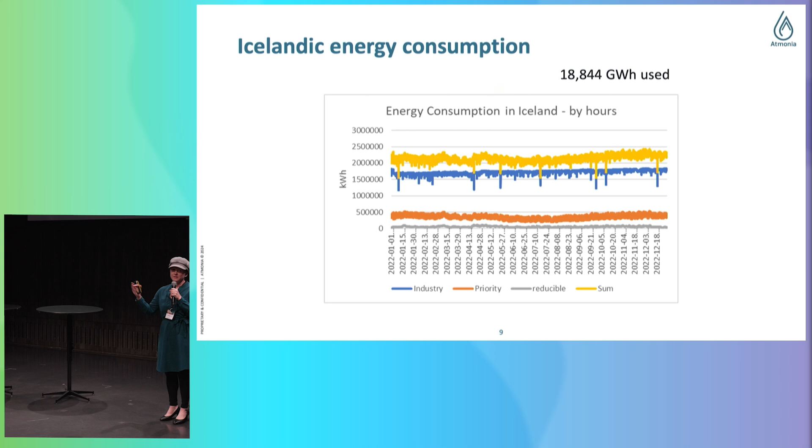There's a lot of losses on the way, but there's also another loss, which is the fluctuations in energy consumption in Iceland. You can see that we have the priority electricity - this is, to a great extent, priority for Icelandic homes. And then we have the industry, which is not fluctuating at all. The yellow is the sum.

Now I just made the very rough assumption, and I know life is much more complicated than this, that for every 24-hour window, we would need to have a base load available in Iceland that is equal to the peak maximum for that 24-hour window.

I've had some discussions and learned, yes, we can probably get some of the peak, create that availability with hydro, create more flexibility, and that's great. But this is not going to play a major role in those rough calculations that I have.

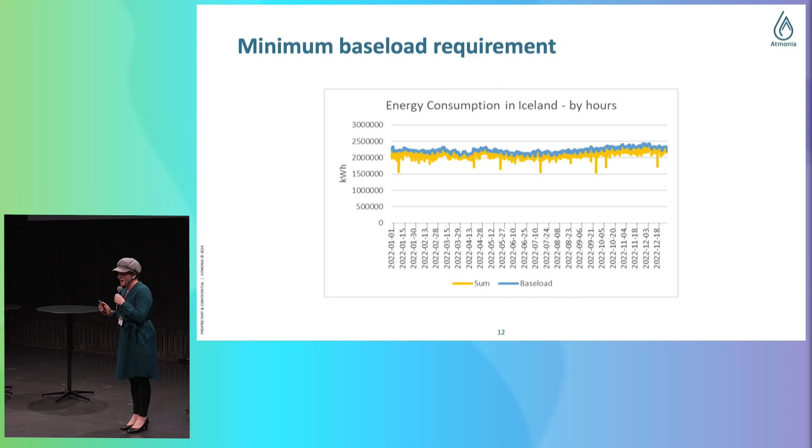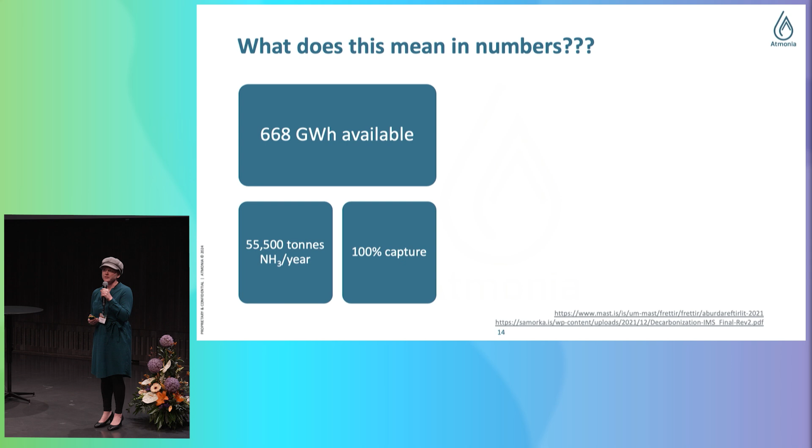668 gigawatt hours with our process, if we capture 100% of it, which of course is not entirely realistic, we could produce approximately 55,500 tons of ammonia every year. In Iceland, we import 10,000 tons of nitrogen every year for fertilizer, so it's even more than we actually need as fertilizer. And then we have the section of maritime transportation.

If we take all of the oil that we use today for maritime transportation and recalculate that into energy equivalents of ammonia, that would be about 369,000 tons of ammonia every year. And that's much bigger than the 55,000 that we can produce with the available electricity.

And then if we segment that into the boats that could potentially fastest take up ammonia, because there's a lot of problems with taking up ammonia as fuel, these would be the smallest vessels that travel the shortest distances. That's because they have lesser problems with increasing the volume of the fuel by 3. And they would need about 39,600 tons a year.

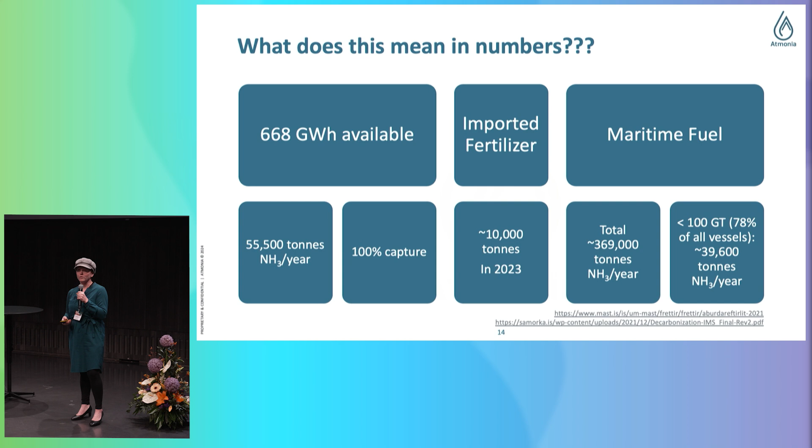So this is an entirely realistic approach to use the fluctuating consumption of electricity and the above baseload, or just the baseload electricity that is already being produced and provided in some way, to produce a chemical that's really in demand in Iceland. We need to import all of the ammonia that we use in this country. But where are we at?

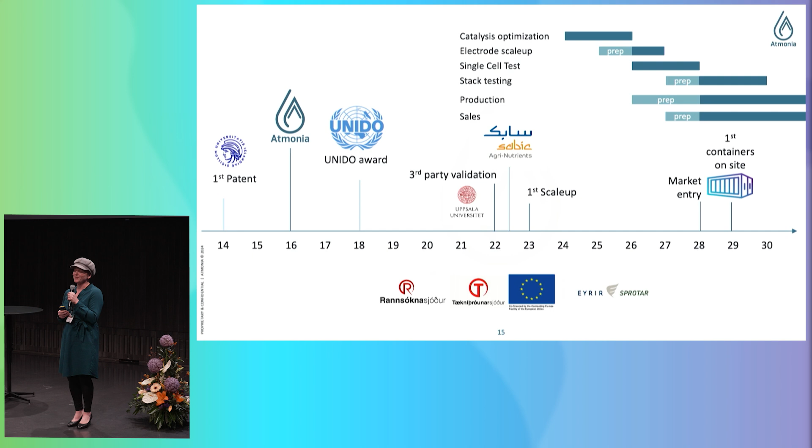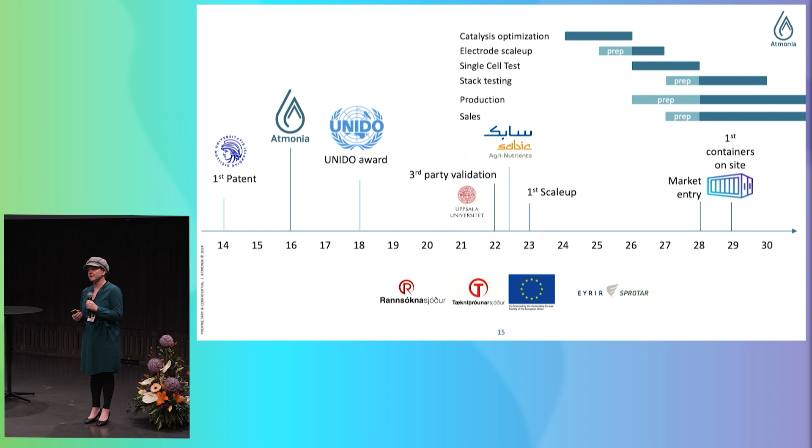We are an early stage company. We aim to have our first container on site in 2029. And from there on, there's a lot of development ongoing and will be needed for the next 5 years. And this, 2030, is also the year that is being predicted as the year where ammonia starts really taking place as a real segment of maritime transportation. So thank you.